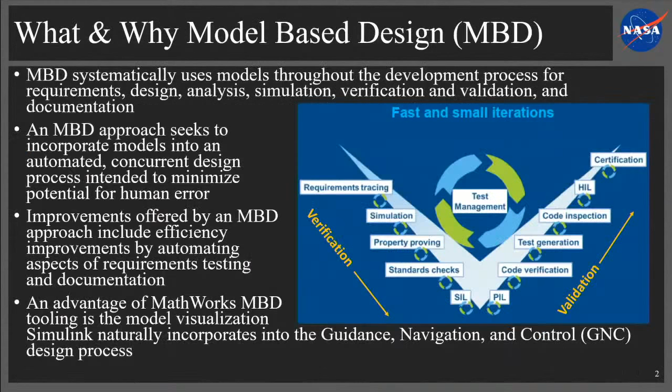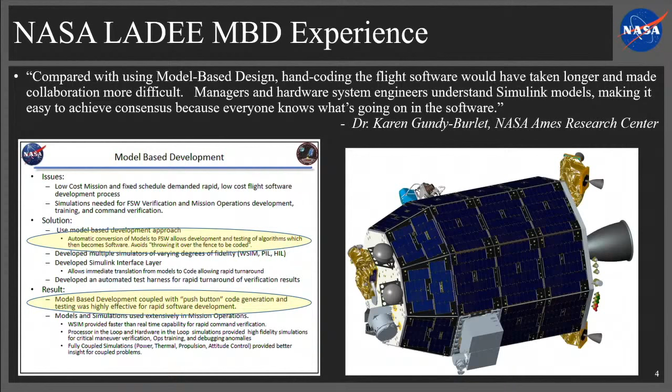Okay, so it flew in 2013 and then was disposed of on the moon's surface in 2014. But they had a good experience with that. And so we were wanting to investigate a little bit more about that and implement some of that process for our procedures in the group that we were in. I will tell you a little bit more about that mission in a little bit.

So, of course, MathWorks has done a lot with model-based design tooling. There's a poster here that's been produced by MathWorks. In fact, I can see the person who wrote the poster, but he worked with others, including some from Marshall and other places, I suppose, to produce that, and they've kind of synced that up really well with their tooling.

So this process that they've developed covers a lot of 7150, including software requirements, design, implementation, and testing. It doesn't include things like architecture requirements and project management requirements, but pretty much everything, as I understand,

with software requirements. And so one of the things that we've been doing as we've been implementing this model-based design approach is we've been meeting and consulting with the software people here at Marshall Space Flight Center, to make sure that we're not getting out of sync and doing our own thing, and that our process will work with theirs.

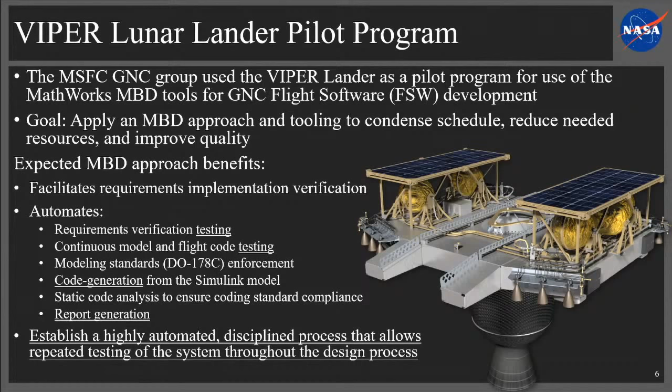Okay. All right, so a core piece of our guidance, navigation, control development system is what we call affectionately GLASS. I don't know that that's meant to imply that it breaks all the time. I think that's maybe more an implication of it offering some better insight into our process. I'm not the one who named it, but basically it stood for Generalized Lander Simulation in Simulink. It now handles more general spacecraft.

It's a 6 DOF, and it's very well designed. Nick's the lead on that, and it's very modern and flexible and user-friendly. He's done a great job of ensuring that each time MATLAB releases a new version, it's quickly checked out to make sure that it'll work for that one. So we're up to date so far on being able to run in the most recent releases of MATLAB. So that's one of the nice things about it.

And so it basically has this common core that has the dynamics in it, and then we can interchange the vehicle-specific plant models and the vehicle-specific guidance, navigation, control models with that core in GLASS. And of course, there's several advantages of this, including that we can do autocode, and that it interfaces with a lot of MathWorks tools. So there's a lot of capability there.

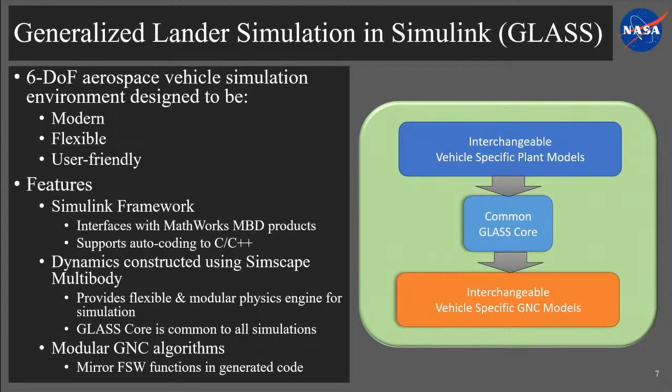So to take a high-level view of our process. Starting from the real world, of course, we want to use GLASS to model the real world and to produce our guidance, navigation, and control flight software.

And so we have where we can check the requirements using Simulink Requirements and Simulink Test. We're of course modeling with Simulink, and we can do code development there, and we can use Model Advisor in that process. We can also automatically generate reports, or do customized reports using the Report Generator.

We can do unit testing using Simulink model and code coverage testing, and we can do autocode, of course, to be able to do the code testing using the Embedded Coder, and we can use the Polyspace tools to do static code analysis, and all of that with the goal of producing quality autocode for our guidance, navigation, and control flight software.

So looking a little bit more at the first half here is what we've gotten implemented so far in the process. It works out something like this. We started with our requirements in Excel in a spreadsheet up here, upper left. And so we can basically put our wording in there. That's the blue column that you'll see there. And our specification values there in the orange column.

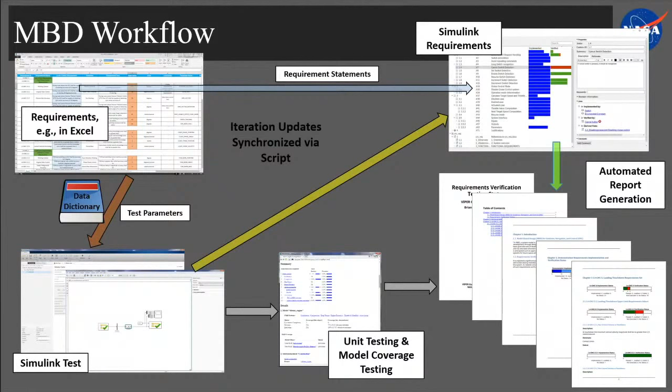Just to walk through this, I produced a video to show you this, but there was some concern that I might not be able to email it to all the people that it had to get approved by, and so I now get to walk you through it.

But basically, this process that I'll show you over the next 6 or 7 or 8 slides is a process that with 1 or 2 clicks of the mouse can update several things in the whole process. This is a rather simple example. We realize there'll be more complicated ones, but this one's where we got with our initial start, and then there's a lot of stuff that goes on underneath, or is potential underneath.

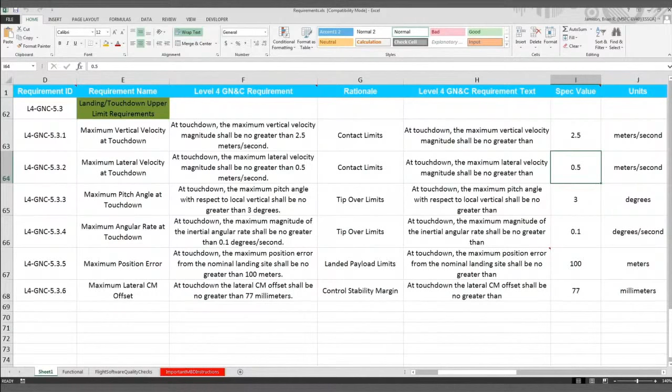And so I guess I was just going to mention the irony that I'm clicking the mouse more times, or he is, than I would have to for this whole update process, just to show you this because of the lack of the movie, just for the file size issue.

Am I in charge of that, or is he? I don't know yet.

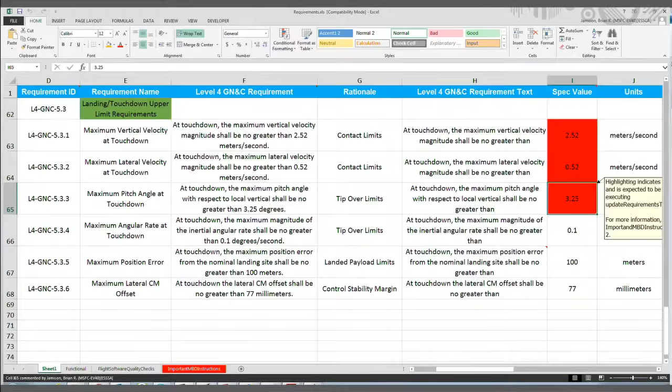But basically, now it's all automated, so it's going to do this highlighting so that I'm careful about how I update it. I follow procedure as given on this red tab down at the bottom you see. But then with just a simple run of this script, just one click there, it's going to clean up my spreadsheet for me. It's going to import everything into the system. It's going to put those values now in the data dictionary for the simulation.

And one thing I failed to mention earlier is that doing it this way allows us to have a single source of input for all of our values for requirements testing. We're not having to put them into Simulink Requirements and into the data dictionary separately. We're just importing them from here into both.

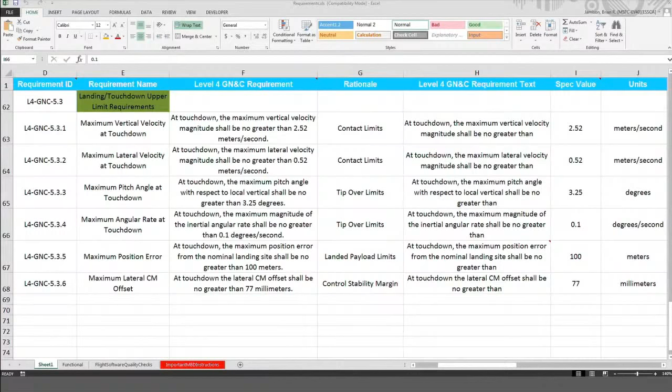One of the other things that same script does is that it can produce reports. Of course, there's more generic reports available, but you can also customize some of your reporting. So that's what we were doing here.

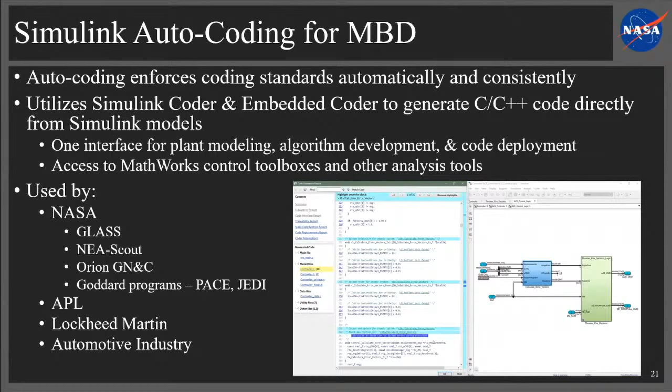And then one of the other benefits of model-based design is the auto-coding, at least for us, since we're not super experts on some of that C++, like a lot of you guys are, I'm sure. But then it enforces some of those coding standards and makes sure that we're consistent there. And of course, that's used by a number of folks.

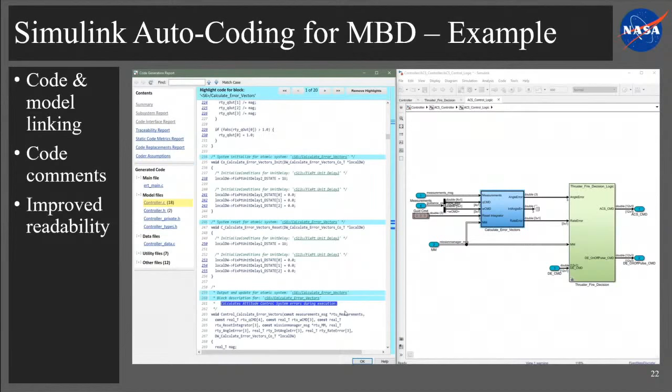Now, a little bit more detail on that one. Basically, we've got our model here on the right, and the code that's produced for it is there more in the center, along with the coding report, where you can dig into the details. You can't read it from where you are, I'm sure, but basically you can see that a lot of your commenting from your MATLAB scripting can go directly into the code here to clarify what's going on and make sure everything's clean for review.

And then one of the nice things is that you can link between the model and the code, and so you can review some of those details a lot easier. Of course, we want to do coverage testing as well, and so there's linking between the model and the test, and the code and the test. And so that eases repair of it and everything.

Of course, we want to do static code checking as well, and the plan is to use the Polyspace tools for that. We kind of just got started into that when, well, the project was canceled, basically.

That reminds me, one of the things I wanted to tell you was, as we were developing this, we wanted it to work for plenty of other programs, and one of the plans at this point is to use it for possibly MAV, the Mars Ascent Vehicle that's been mentioned here. That's one of the things with our developing this: to develop a process that'd be useful across any program.